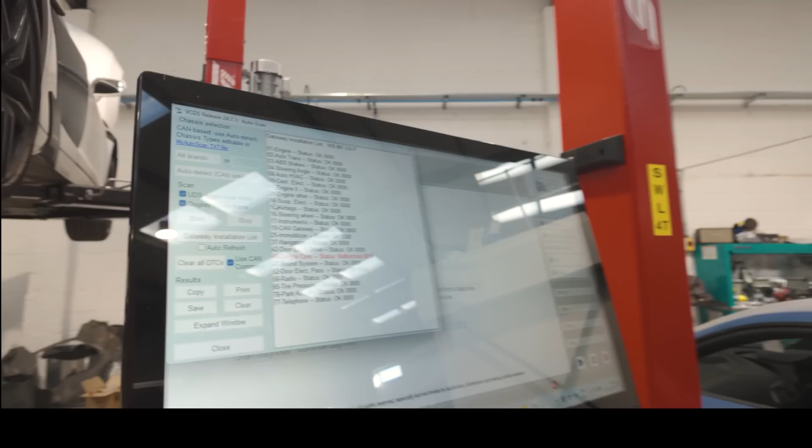So anyway, we use VCDS for 99% of all the things. Industry standard. So we can talk to any control module you want. You've seen me use this before. You can go in, you can look at fault codes, you can look at measure value blocks. You can do adaptation values. You can code the control unit. You can do quite a bit. The only sort of stuff you can't really do is anytime you've got to put a chassis number into a module or code an immobilizer, it kind of doesn't like it.

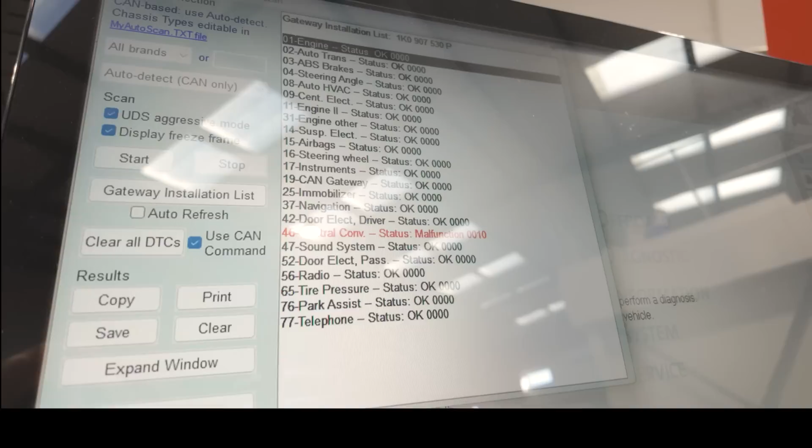So then we use something called ODIS, which is Offboard Diagnostic System. This is factory diagnostics, genuine stuff. So when you open VCDS, you get that screen. You can obviously go into an individual module, or you can go into auto scan. We use auto scan, so it goes through everything, which is what I just showed you.

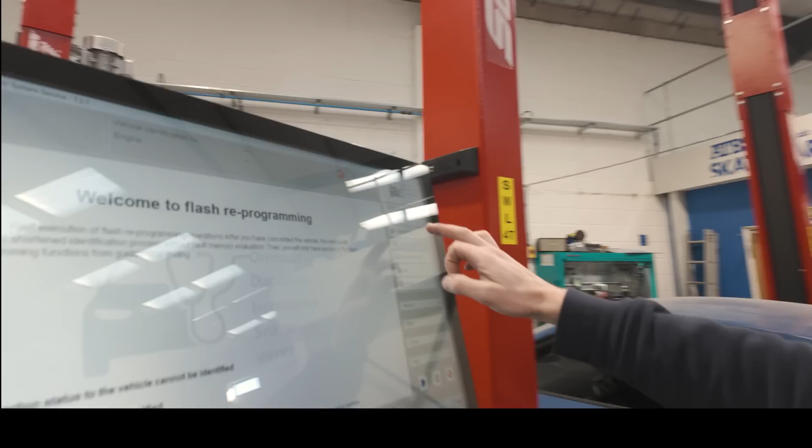ODIS, you'll plug it in. It connects to the car, so it can see the terminal 30 voltage, and it says the ignition on. It can see the terminal 15 voltage. Check me out, touchscreen. And then it pulls the VIN off the car. Once you've then got the VIN, you can start diagnostics and you can go into it.

Ah, thanks mate. Cheers, dude.

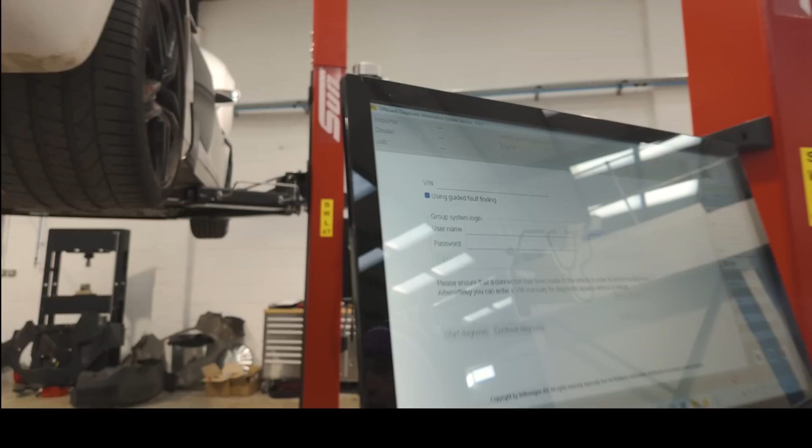What that then does is populate everything the car's got, so it walks you through all the test plans, all the control modules, everything. But pulling the VIN is important when you've got to code a control module, because that's the VIN it then stamps in the control module, and that's the unique identification number for that vehicle.

So, had this in, put the new module in it, couldn't get the VIN to pull. I could bump through to test plans, but when I tried to go into a coding test plan, it would fail. So my hurdle is, how do I get the VIN to come up?

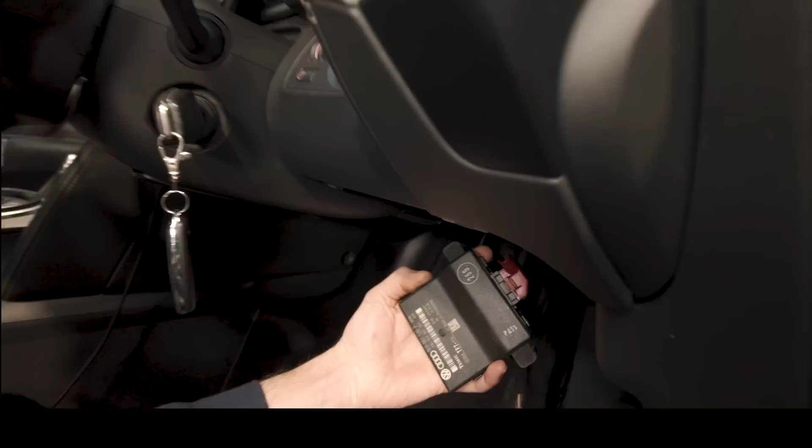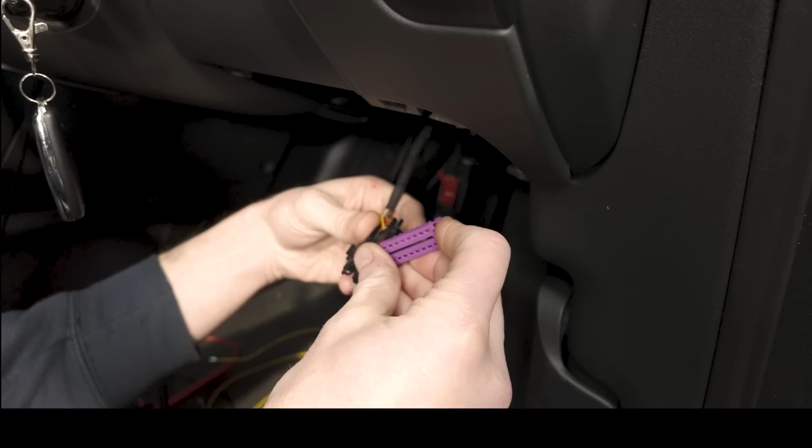So I borrowed a gateway off another car. The gateway, you stick your head under it. Hang on, let's have a look. That's the gateway. Okay, so that's what we call a gateway, basically the interpreter for all the car's communications. That's the T16 socket, so that's the OBD plug. You all know what that looks like in your car, it's just got the terminal lock missing. So that sits here and we plug into that, and then that's the gateway module.

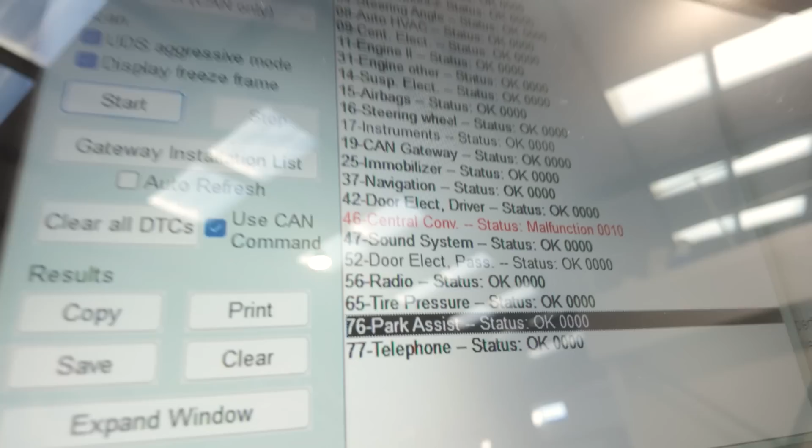So I tried a new gateway module, swapped it off another car to try that to rule that out. No different. Checked the live, the earth, and the ground, the two lives and the ground on the T16 socket. They're right, I knew they were right, but that doesn't work. So now all of a sudden, on one diagnostic machine, I can talk to the car fine, on another diagnostic machine, I can't. So I have no error codes for communication issues. So as far as the car's concerned, the only thing inconvenienced is the alarm horn, there's no problem.

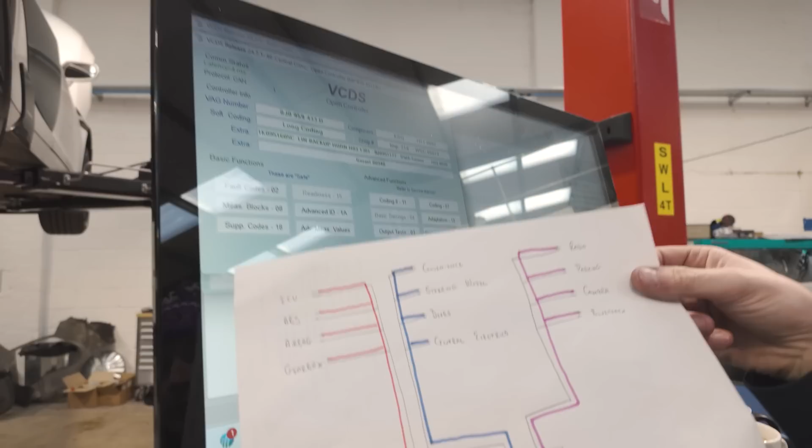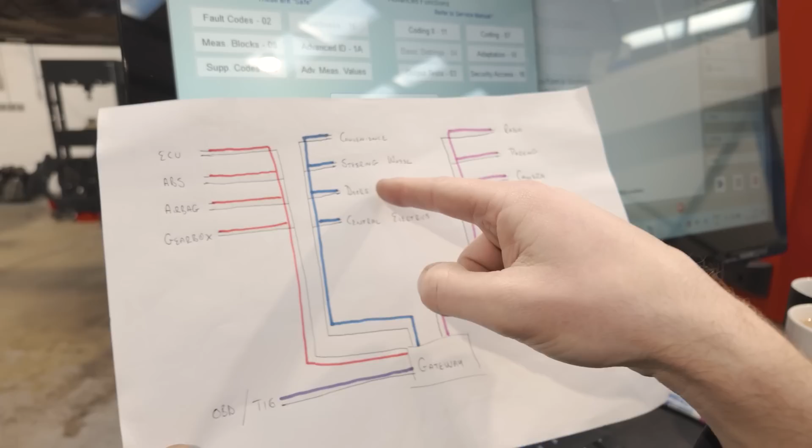So this is how the communication system works on a car. That's drivetrain CAN bus, that's convenience CAN, and that's infotainment CAN, and that's the gateway between them. There's certain things where signals have got to cross over from network to network to tell different systems different things. So for example, if the door's open, the signal sends to the gearbox module so it won't go in gear.

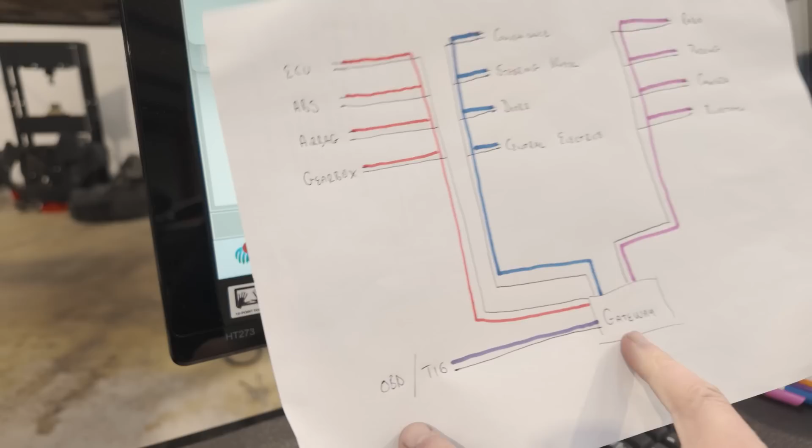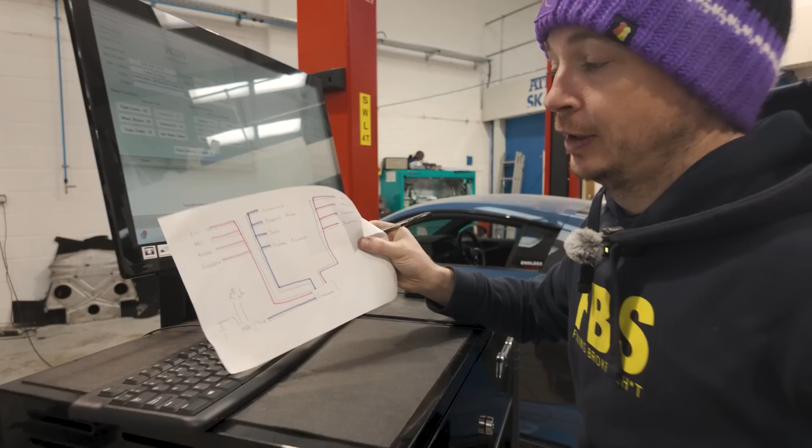So straight away I've narrowed that down. I know my lives and my earths, my gateway module, are right because it's online and it's working. And I get a T30, which is battery voltage, T15, and a ground. I know they're right because I've tested them, and they come up on a diagnostic machine. So what I'm actually missing is the ability to talk to that through those two wires.

Anyway, after a slurp of tea, that's when we get into it. There's only two wires between those, which are CAN bus wires. So what we did was...

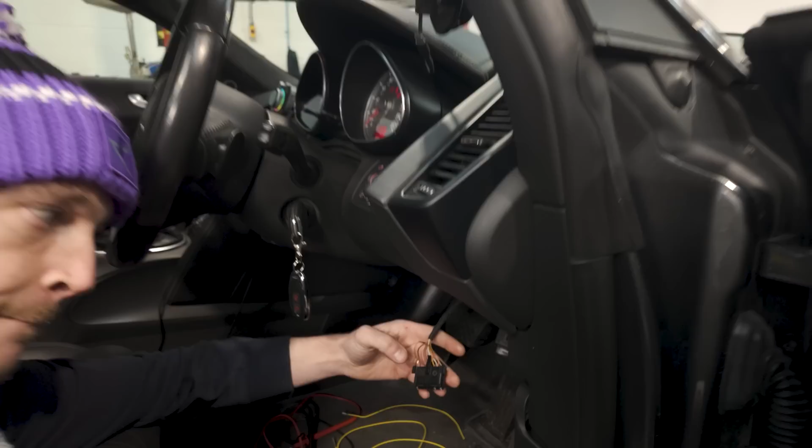Let's have a look. Let me just bring this light around a little bit more. If you come in here, Mush. Right, there we go. Hang on. Okay, yep, so that's T16.

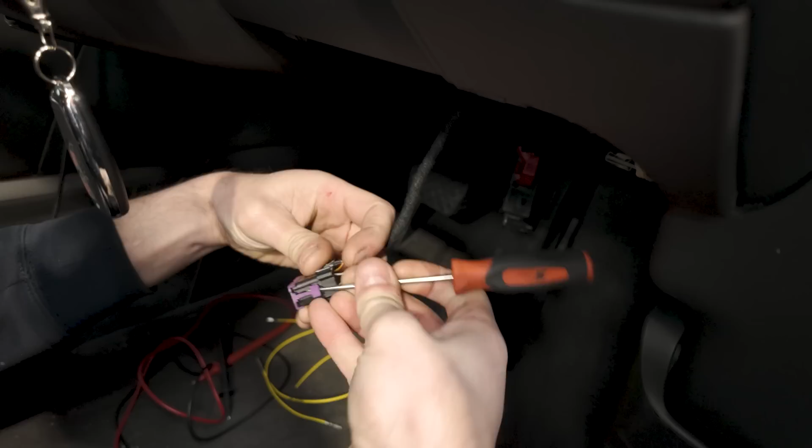So I've pulled the lock out. The lock is there to stop the pins backing out - it's a mechanical lock. So you just pop the lock out, and then you can identify your wires, and then you just lift the little tab out.

Like so. And then pull a wire up, all right? Like so. So we're going to pull out the CAN high and the CAN low wires.

Okay, and I'm just going to tuck them back out the way. Now I've got new repair wires, because I was going to build a loom. I built two lash-up ones, but we're basically going to build a repair loom for the CAN bus wires.

And then I need to go 1, 2, 3, 1, 2, 3. Oh wait. Like so. All right, there we go. Now, how did I know it was those two?

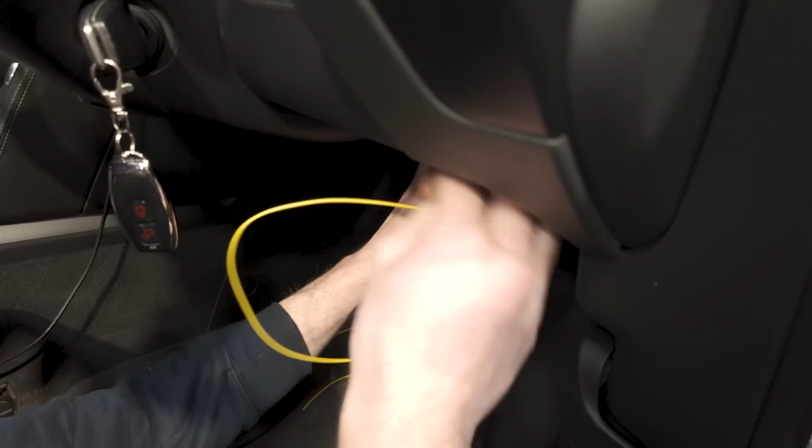Which is probably a good idea to show you a current flow diagram. So let me turn the ignition off. So I've unplugged the gateway because we're going to have to do the same at the gateway. This is the current flow diagram for the T16 connector.

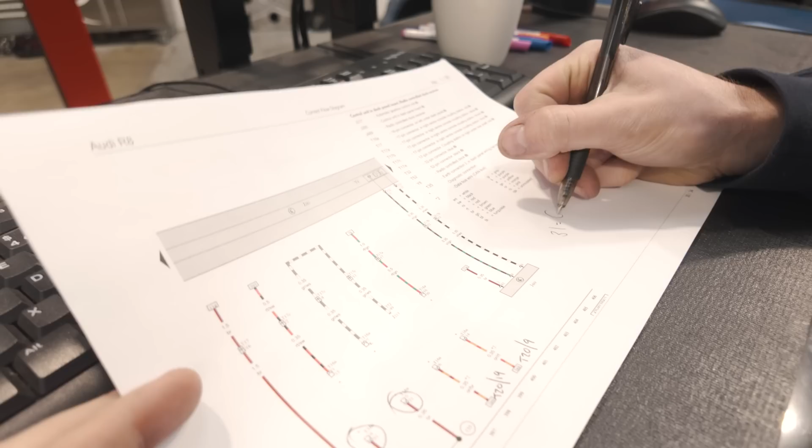All right, so 31 is ground. So we know they're good, so we can cross them off. 15 - so T16A is the plug, pin 1 is that wire, and then 15 is a designation, so 15 is ignition, and we know that's good.

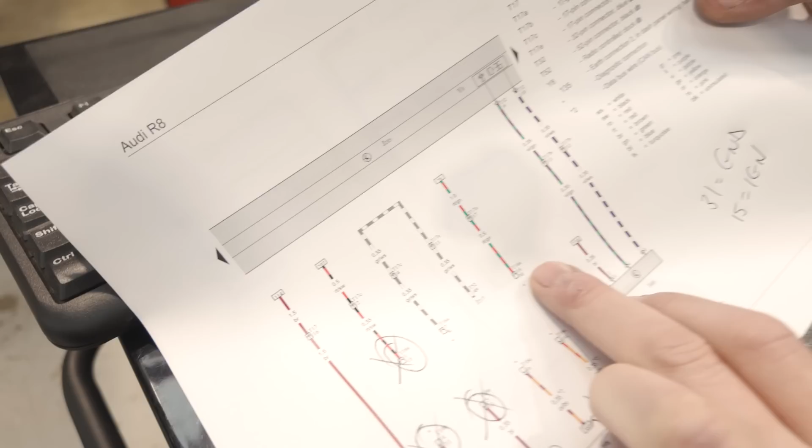Same again, T16A is the OBD socket. Pin 16 is after the slash, and then 30 is battery voltage. Those are the same in pretty much every car, especially German stuff - you go to a Mercedes wiring diagram or a BMW, terminal 30 is a permanent live. Terminal 15 is always - it's like an ISO standard, a sort of standard thing.

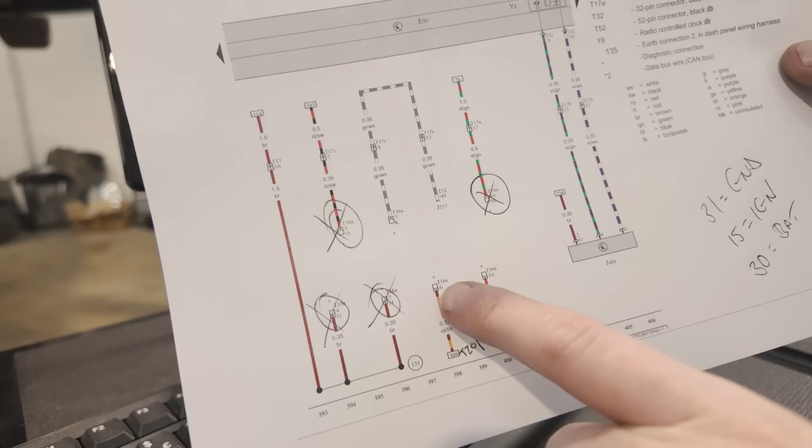So these are the two CAN bus wires. Just hold it looking at that way slightly - is that better? Yeah, lovely. So we've just unpinned terminal 6 and terminal 14 at the OBD. Now we're going to go to the gateway and unpin terminal 19 and terminal 9.

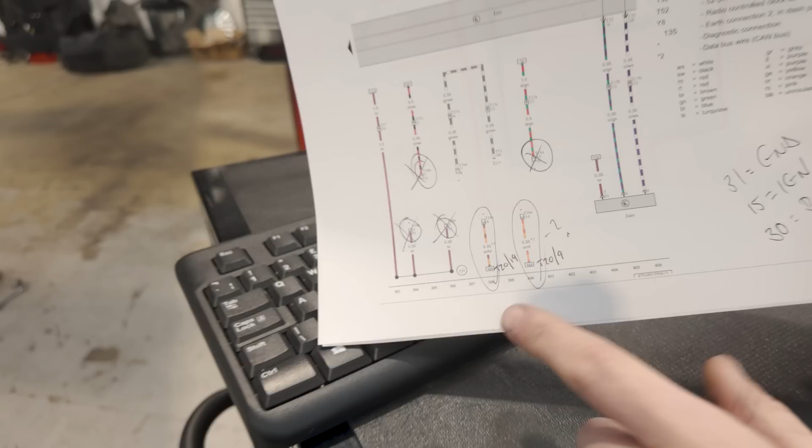Because I think that's the issue on one of those. Now, what I can't answer is why between VCDS it works and why between ODIS it doesn't work - whether there's resistance on the line and one's more sensitive than the other, I'm not sure. But I know this fixes it because I've already done it.

We're just going back through it. So what we're going to do now is we're going to unpin at the gateway those two wires and run donor wires in, and then we're going to see if ODIS works.

Let's do it. And this took - now, because I know the answer, it'll take 10 minutes. But going through and ruling all of this out the other day is over a day's work, for charging a customer half an hour to swap a suspension module. What a nightmare. But of course, what else can you do? I couldn't fix the car without fixing this problem.

But it's not my customer's problem. Maybe the other side of it is Audi would have just charged them, and I bet they would. So this goes to show again the hidden layers with things like this.

How you take an under tray off - he's spent the last hour trying to get the under tray screws off. Does that mean they're rounded off now, so the gearbox oil change is now 2 hours instead of an hour? How does that work? Some people would be bastards about it and charge, but I feel different about it.

So, right, let's walk you through this gateway module then. If you jump down in here, mate.

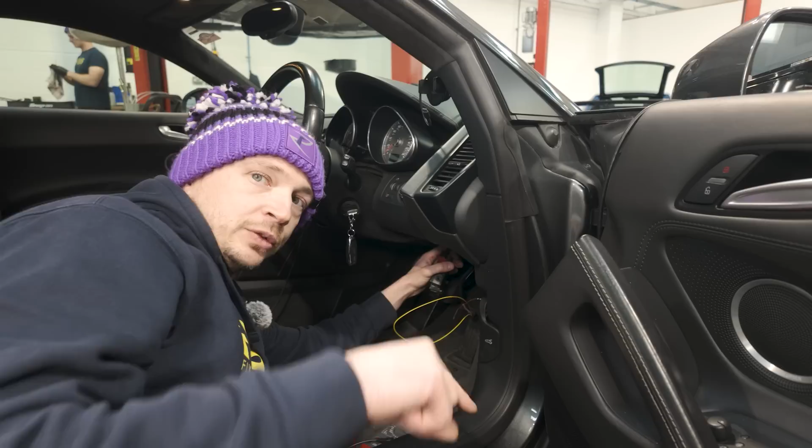So CAN bus wires work in pairs. You've got CAN high, CAN low. They work on a 5-volt signal. Depending on what bus you're talking to, it depends how they work. So a CAN high signal will either sit at 2.5 volts and go up to 5 and then come back at 2.5 volts, or it will sit at 5 and pull down to 2.5 volts and go up. The opposing side of that is CAN low will do exactly the opposite. So if CAN high starts at 2.5 and goes up, CAN low starts at 2.5 and goes down. So when you scope them, they're mirror images. And that's why CAN bus is so stable, because there's always a redundancy, CAN high and CAN low.

They talk in pairs. So if one of them starts to have damage on a wire, or has a CAN transceiver that's sending an incorrect signal, there's always a backup on the other side, and then you'll get a fault code for CAN wire in single wire mode, or CAN high implausible signal, something along those lines. That's why CAN bus is super stable, because it has a redundancy.

So what we've undone here is we've unplugged the gateway module - let's have a little look over there. This is a 20-pin connector, so this will be designated as a T20.

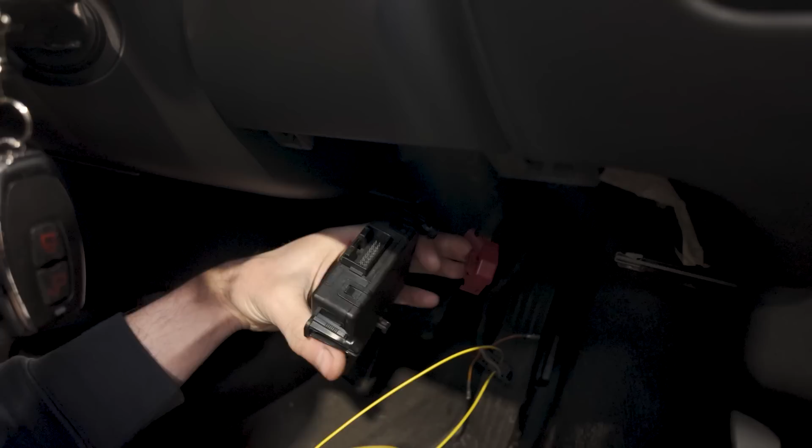Is that similar on every module, on different cars? Pretty much, but different versions, because as the software changes inside them - like that is a 1K0 number, and then the later ones now are like 4 DOs - they change. So you can't put a later module on an early car or vice versa, because the language inside them is different.

Okay, but I suppose same with ECUs - they're made by certain companies. There are only a few out there, aren't there.

All I've done there is there's a little release for the cover just here. So you just pop that backwards.

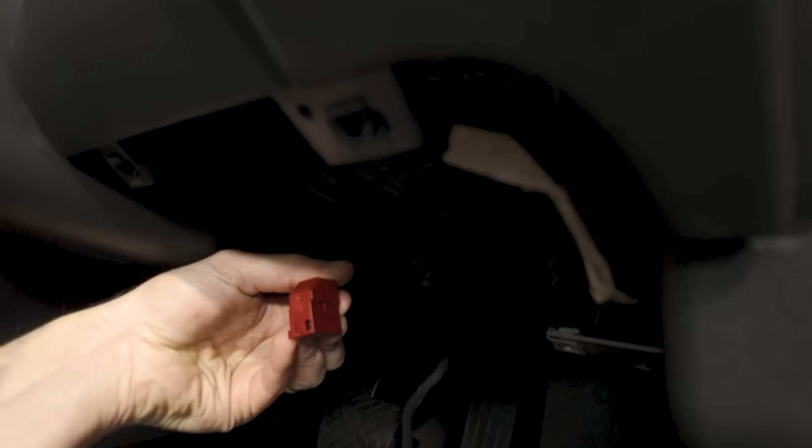Forgive us here because I'm leaning right over Rick's midsection here. I know we know each other very well, but I've had a quiet week, so the attention would be nice.

You just see that - there's like a little block there, and you just pull it back, and then you can slide that off. There we go. All right.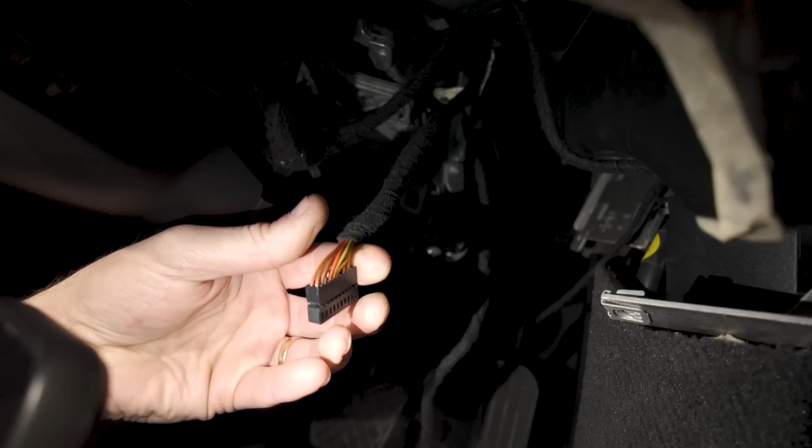Then you get the numbers on the front of the housing. So 10 is top left, 20 is bottom left, 1 is top right, 11 is bottom right. So you obviously just need to keep your idea of where everything is.

So we want 9 and 19, and I know that because I've looked at the wiring diagram. So we want second in from top left, second in from bottom left. All right? And this is a tricky bastard, because what you kind of need to do is hook it.

Again, you'll have to forgive us here, it's very awkward to get in. Let me just try and - so I hook a wire like this, like a wiring. Hold it there. Right, if I do...

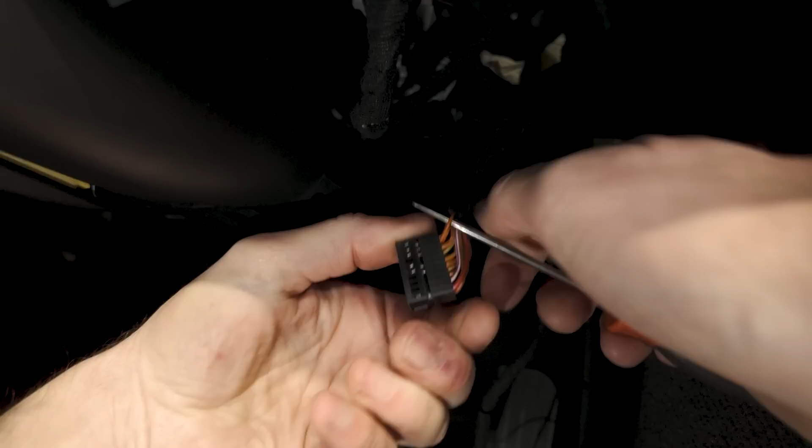So I hook a wire in like a knitting needle. Yeah, that's the wire I want. You've got to be careful you don't damage it. And then there's a little tab.

Film us doing this quick - on your phone, do it landscape, just to show what goes on behind the scenes. I'll drop it in.

So all I've done there is I've pushed the little release tab back, locking the pin back on the terminal, and I've picked the terminal out. So that's one out - same the other side.

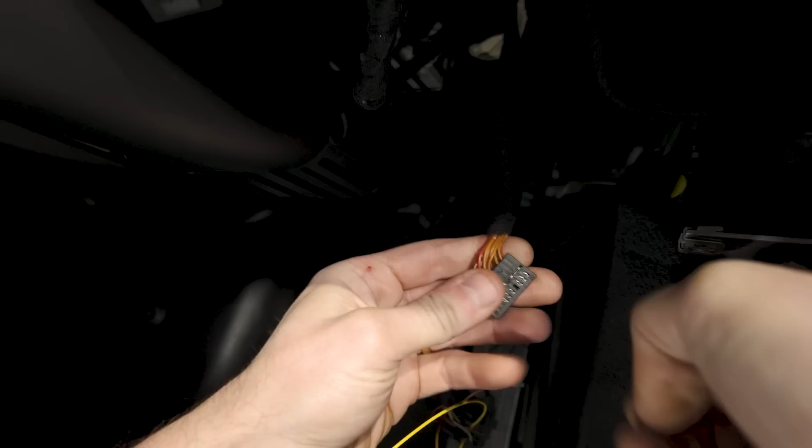So you want to find the wire you want, which is not that one. That's the third one in, Rick.

The viewers would have a little chuckle to themselves if they could see the position that we're in right now.

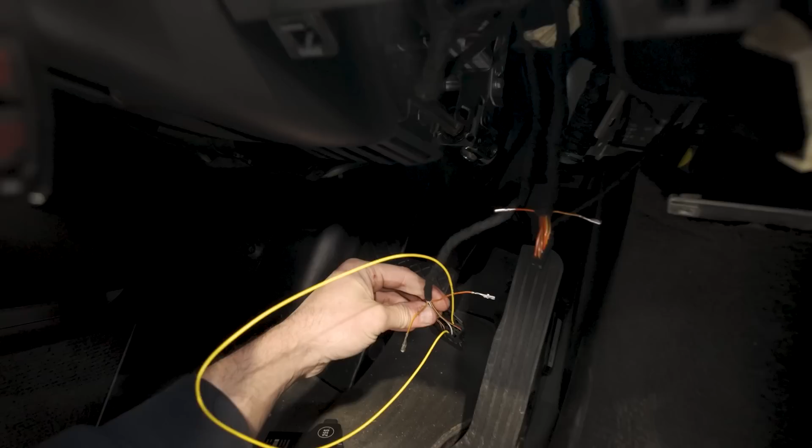So now those 2 wires, here and here, are isolated from each other. Okay, that's the diagnostic bus. So what I'm going to do now is stuff it in.

Stuff it in, lad. Can't see a bloody thing. There's one.

Ooh, and is that a fart or is that a squeaky seat? Squeaky seat - I didn't fart in your face, mate.

All right, okay, hang on. So I've got the 2 repair wires poking out. So I'm going to put the bridge back on, and mainly I'm putting that back on because it locates the terminal block in properly.

All right, so now I know that top wire here is 10, that bottom wire is, sorry, that's 9. That's 19. I've obviously kept the original wires poking out the side so I can see the colours.

So that's plopped back in. And all I'm going to do now is just quickly join these 2 wires together with a twist. Yeah, we will do a proper repair, but I just want to prove the point.

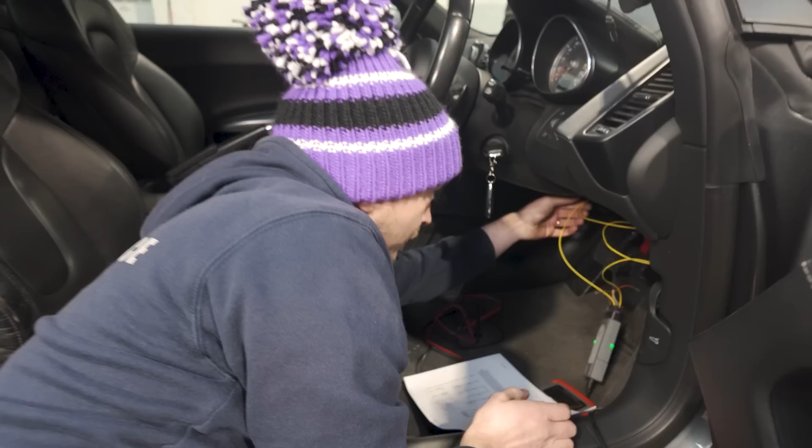Ooh, so what I've done here - oh, that was my knee, sorry - is I've taken terminal 6 off the OBD socket and connected it to terminal 19. Oops, hang on, that was the wrong gateway.

And I've taken terminal 14 of the OBD socket and connected it to terminal 9 of the gateway. Okay, that's all I've done.

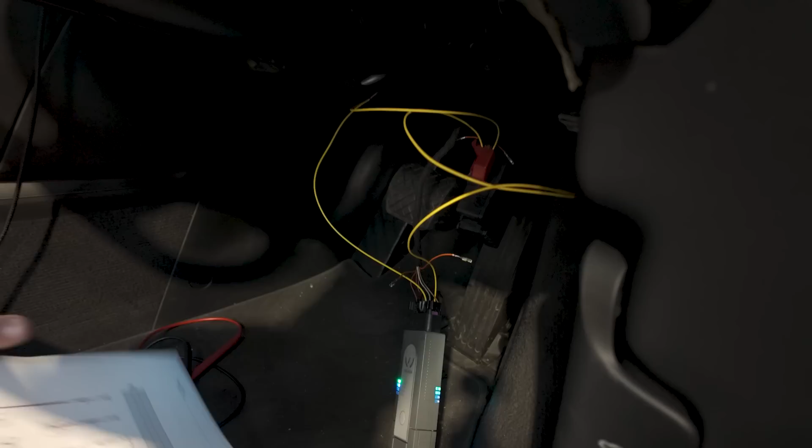I have not found any broken wire. I've even got my voltage meter - all right, so this is a continuity tester, so it beepy beeps.

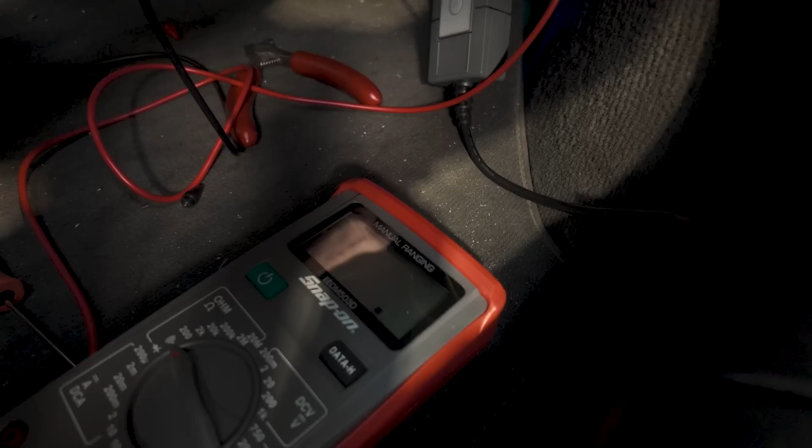Right, ready? So I've got 0.5 of an ohm on that wire, and 0.4 of an ohm on that wire.

I got nothing crossing between them. I got nothing short to ground on either, and I have checked short to live as well, and I got nothing. So from a test point of view, nothing is wrong with the wires between the gateway and the OBD socket.

So I've tested continuity end to end on both. I've tested short together, short to ground, short to live - I got nothing, right? So from a testing with a multimeter point of view, those 2 wires are perfect, right? So they're good to go.

Now we know they're not broken because I could talk to them on VCDS. But look, I've just plugged Otis back in. Mate, there's a check - it's got terminal 30, it's got terminal 15, and there's your VIN.

There's a bit of noise in the background - that's Mitch drilling, working for a living. Yeah, makes a change.

So we have connection. We do, and it's now.

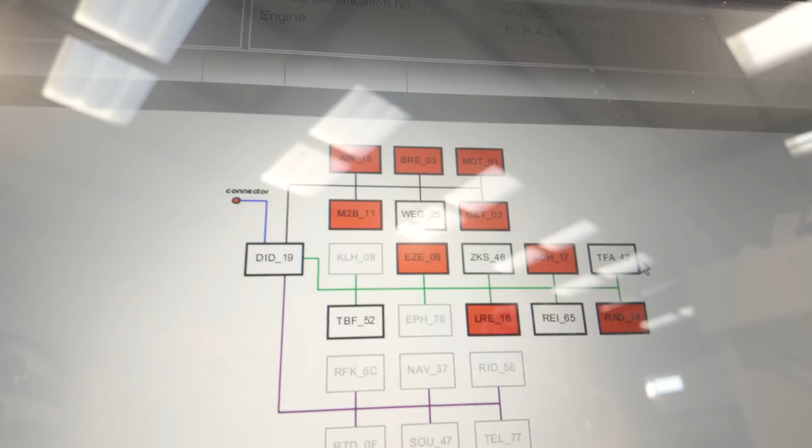I would argue you could sit there and go, oh well, maybe it's because the terminal's opened up a pin. Yeah, I agree, but I've checked all that, and the pin tension's fine. And I've had that wire in, apart, back together, and again today, and it's consistent when I do both.

So I don't know, I can't answer it. But you fixed it. But I fixed it. I don't know what's wrong, but I fixed it. Have you seen that before?

I've never seen it like that before. I've seen obviously broken wires, like a provable broken wire in a loom.

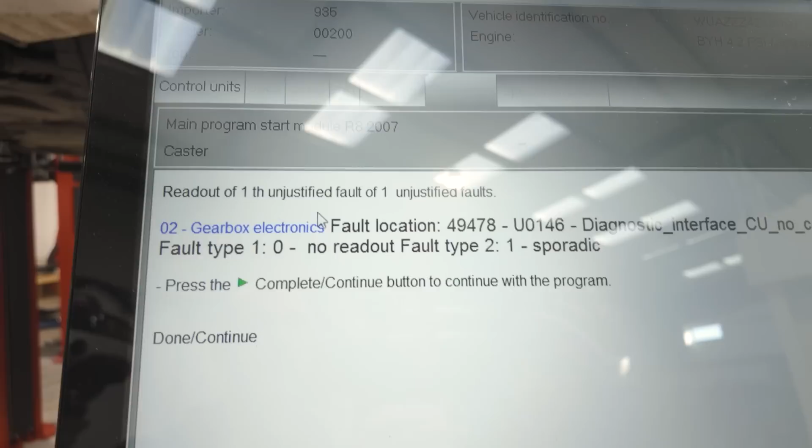But if I give anybody a voltmeter and told them to test the T16 to gateway wiring, they'd say it's fine, it's okay. And to be fair, it is, because if I plug VCDS in, we'll do this now. This is going to come up with a shitload of faults for comms, because we've had gateway unplugged. Remember, gateway is the bridge between all the modules.

Like Thanos' glove, yeah? I like that, good analogy.

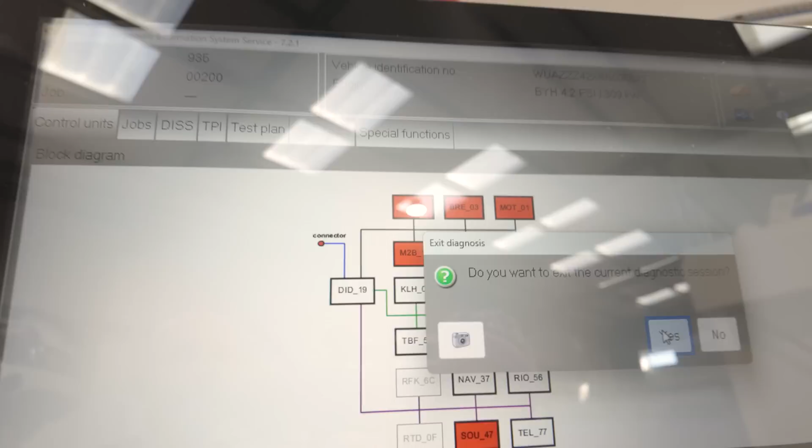So what I did then was I went into suspension control module, code control unit. It shoves a VIN number into the suspension module, and that's it, job done. Because I'd even tried on another car thinking, oh, it's only coding, I'll code it in on another car. Tried that, says VIN number's wrong.

You'd think, yeah, it's fine, but it says VIN number's wrong. So I was like, right, shit, I've actually got to get this working properly then to be able to code it to the car. But there's no measure value block for VIN number in a suspension module. I didn't know that was a thing.

Should new test plans be created? No. Do you want to do readiness codes? No, it'll come out, I'll go all the way back to the beginning. So that's working, VIN number's there. Job's a good one. All right.

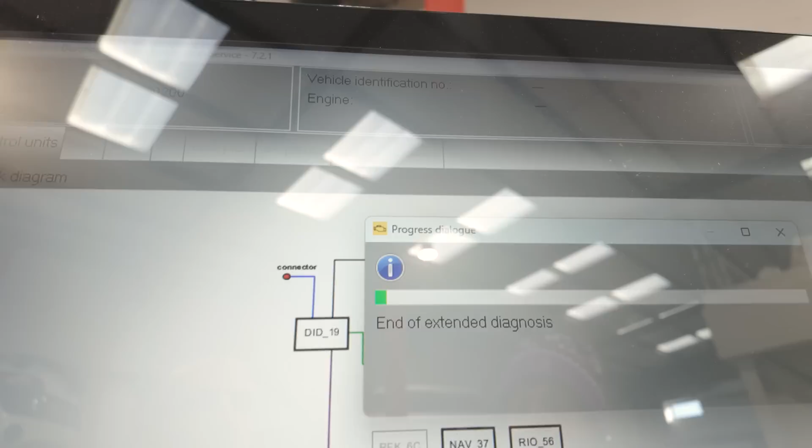Go back out, done. Okay, watch now, no response from controller because everything's unplugged. If I do this...

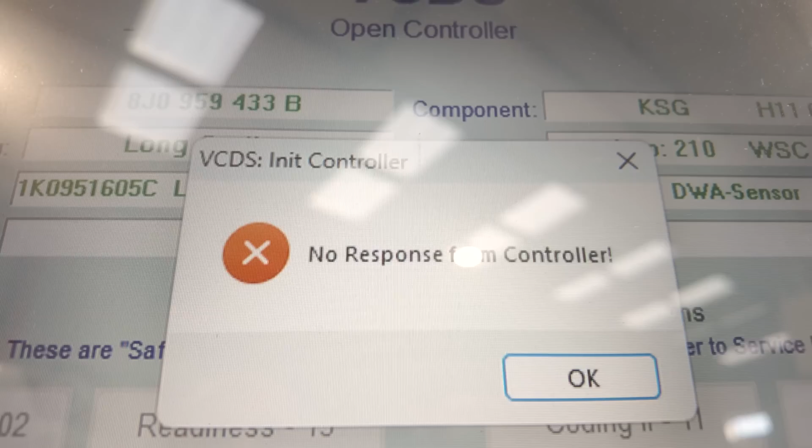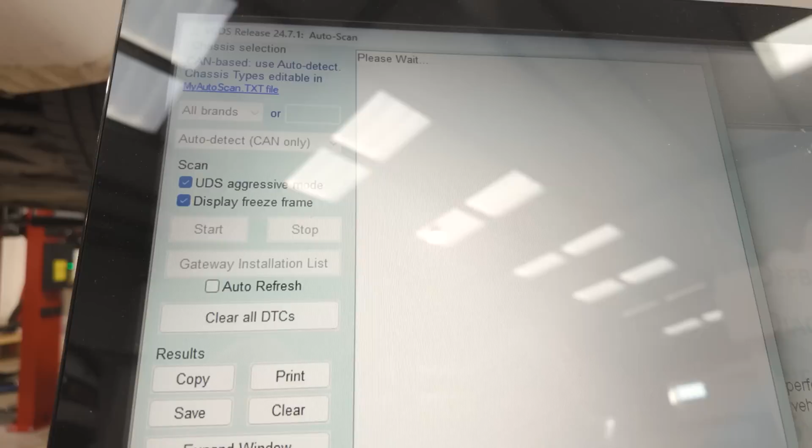Hang on, let me just film what you've done there. So all I've done now is I've unplugged the Otis head and I've plugged in VCDS. VCDS was never the problem, VCDS is working fine, but it's working on Otis again now.

So what you'll see, look, is if you look at that, I've got no ignition, no battery voltage, and I've got no VIN. So if I just quickly swap it now, what should happen is this. Look, I've just unplugged it and plugged it back in, and it comes up with chassis number again straight away. So it auto-sources it off the car.

And that was all that - rewired the T16, checked all that, swapped the gateway module out, coded a suspension module on another car, all that, then stripped the bottom out, rewired that plug, all to get a suspension module in and coded, just to fix the suspension light on the dash.

And that was like a day and a bit's work. And what would that have normally been? Well, we're 125 an hour plus that.

But how long would you expect that would take, without all that, to code a suspension module in? Half hour? There you go. And the half hour turned into a day and a bit. That's insane.

But again, how do you hand that off? Yeah, you can't hand it off, can you? I don't think you can. Well, that's the difference, isn't it?

I wouldn't be happy talking to this guy now going, oh yeah, I had to do this, because it sounds like you're milking it, sounds like you're taking the piss. So I don't know, maybe that's why we're as busy as we are, because everyone's kind of figured out that we're honest and we do a good job, do you know what I mean?

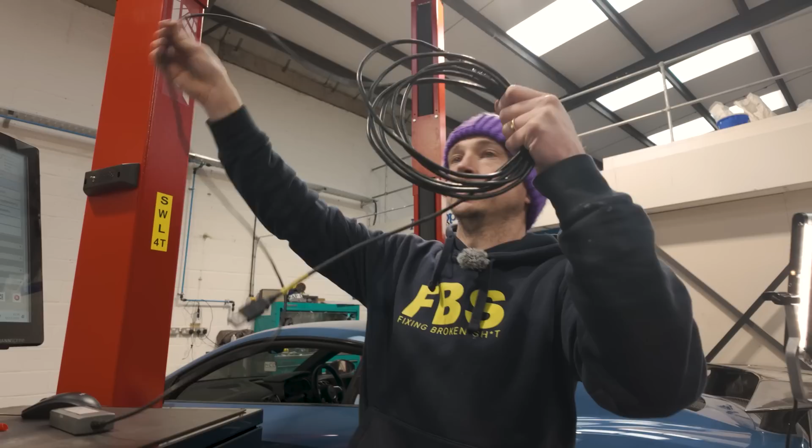I don't know, mate, I don't know, but it's fixed now. We've got special heat shrink crimp connectors we use, repair connectors, so I'll do that and tape it in, so you'll never know.

And yeah, if anybody's got any ideas, I am all ears.

The only thing I can think of is there's a slight resistance in the wiring, maybe that is too much, maybe half an ohm is too much, I don't know. What's half an ohm between friends? Well, yeah, that's what I thought, I would have thought half. But it's non-stop.

On that bombshell...